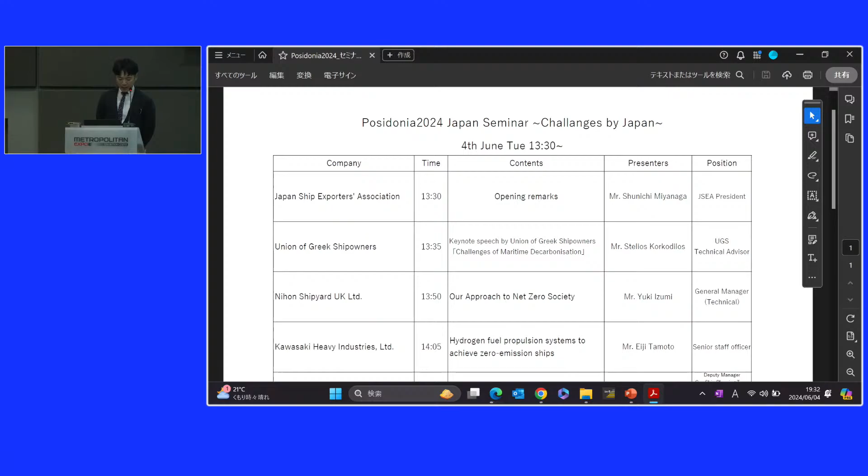I hope you are enjoying this wonderful maritime exhibition, Posidonia, in the brightest weather. Today we'd like to share the latest activity from Japanese maritime industry in this seminar. This seminar is organized by Japan Ship Exporters Association and sponsored by Nippon Foundation. We will cover the most interesting and challenging topic in the maritime industry, which is greenhouse gas emission reduction as well as energy efficiency. I believe all of you will find them interesting, and I'm sure you will be satisfied with our event. Therefore, I hope you can attend the whole of this seminar.

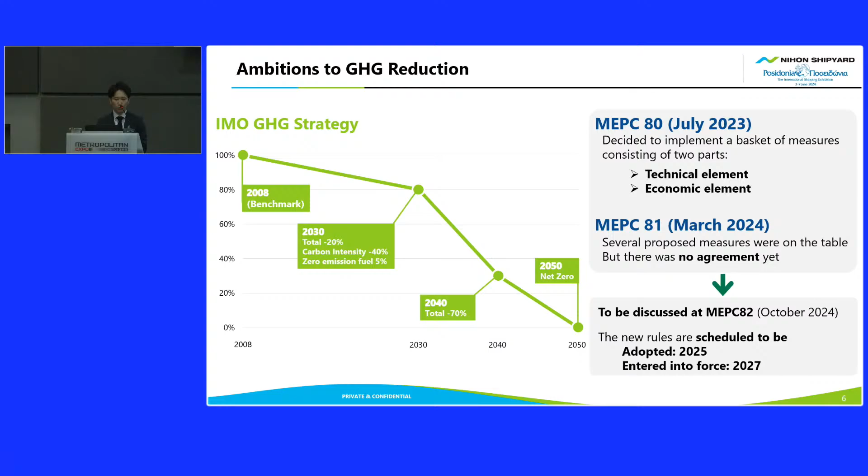Anyway, our final goal is to reach net zero emissions by 2050. So what can we do for GHG reduction? There are several approaches to GHG reduction.

First key is resistance reduction. We will continue improvement of hull forms and energy-saving devices because it's very important to improve the vessel's fundamental performance. Also, alternative fuels are an important approach. And we have other ways, such as renewable energy, operational solutions, and other technologies such as shaft generators and carbon capture systems. The key point is to combine these various technologies.

And from the next slide, I'd like to explain our approaches to GHG reduction. Oh, sorry. First one is hull form improvement and energy saving devices.

Our biggest sales point is that we have test tanks in our technical research centers, so we can develop high efficient, high performance hull forms and optimize our energy saving devices. Also, we think the vessel's performance under actual sea conditions is very important.

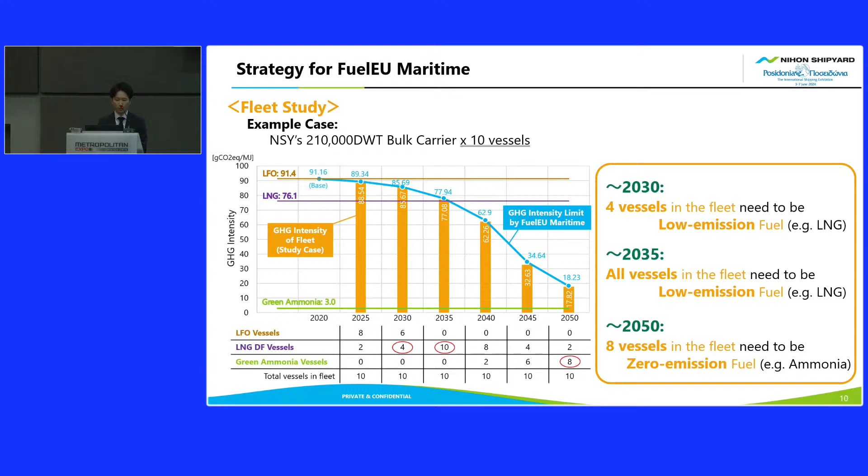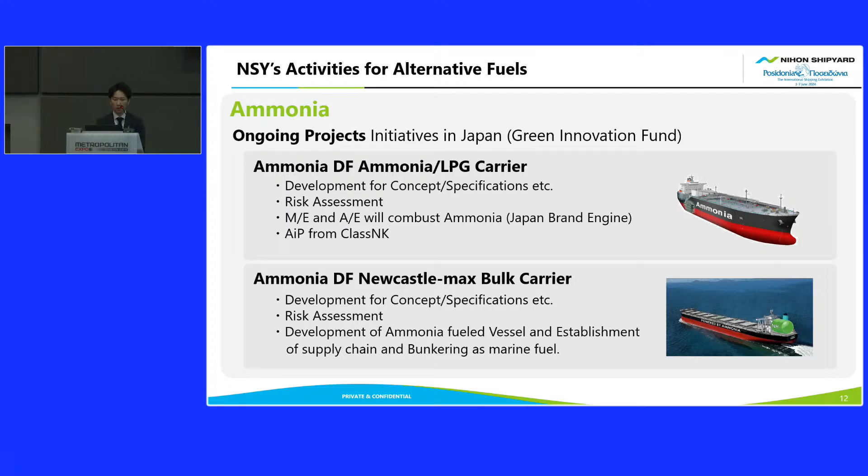For ammonia fueled vessels, we have 2 ongoing projects: one is an ammonia fueled ammonia LPG carrier, and the other is an ammonia fueled Newcastle Max bulk carrier. Through these projects, we will establish our technologies.

Renewable energy is also one of the solutions. We can conduct installation studies for a wind-assisted propulsion system called WAPS. Energy saving from WAPS does not depend on the fuel type. When WAPS is installed on an alternative fueled vessel, the payback period is shorter and benefits are greater compared to a conventional fueled vessel.

Regarding other technologies, carbon capture system, shaft generator, and air lubrication system are also major ones. We've carried out feasibility studies, and we can conduct installation studies for such technologies on our vessels.

In closing, this is today's summary. There are several approaches to GHG reduction, and resistance reduction is very important for fundamental vessel performance. Switching to alternative fuels is necessary for reducing GHG intensity, and it is possible to combine multiple technologies.

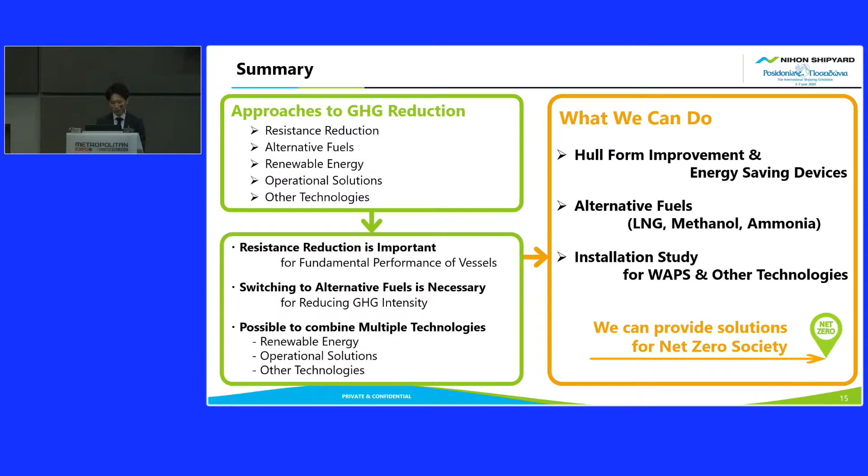Finally, let me close today's presentation with our company's motto: growing together with our customers through shipbuilding and offshore technologies. Thank you very much.

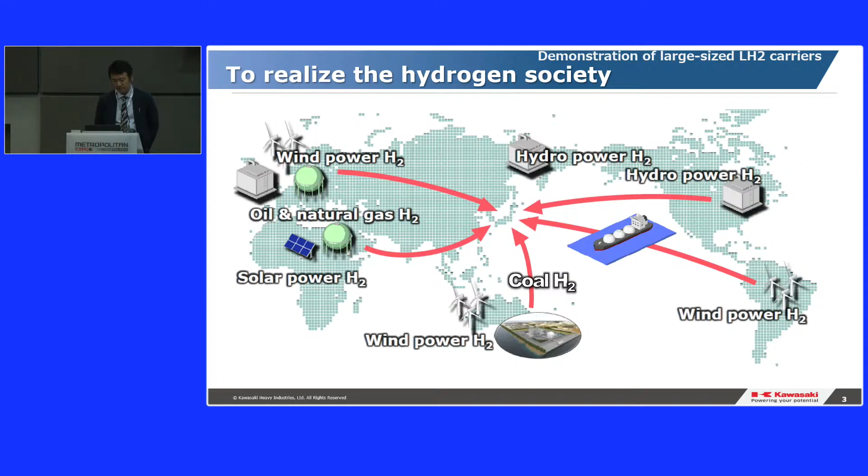This is the concept of a CO2-free hydrogen supply chain. The objective is to establish a stable supply of hydrogen while suppressing CO2 emissions. CO2-free hydrogen can be produced using renewable energy. It can also be produced from fossil fuel when combined with CO2 capture and storage systems. The produced hydrogen is liquefied and transported to Japan by liquefied hydrogen carriers. In Japan, the hydrogen is used for power plants and other consumers. For transportation over long distances, mass transportation of hydrogen is needed, and large-size LH2 carriers are also necessary.

Kawasaki has built more than 40 LNG carriers and more than 60 LPG carriers. Therefore, we have a lot of experience and technical knowledge about propulsion plants for liquefied gas carriers. In 2020, we built Suiso Frontier, the world's first LH2 carrier, which proved that it was possible to carry LH2 over a long distance. Now we are developing a large-sized LH2 carrier by using our experience with liquefied gas carriers.

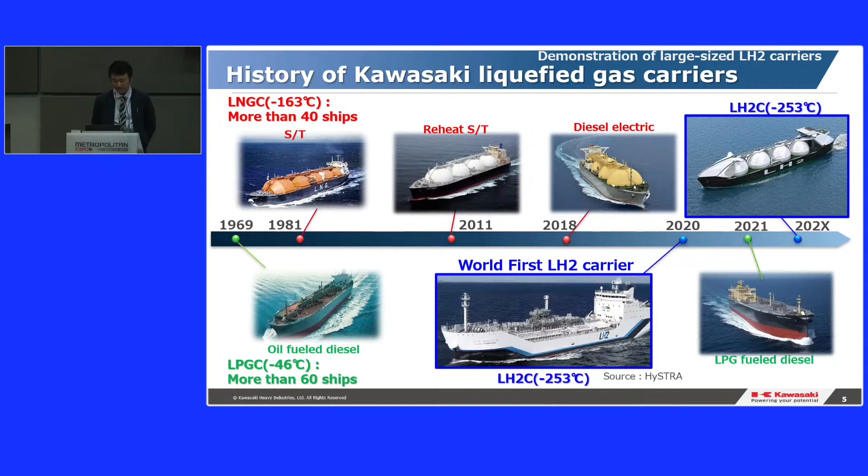This is the large-sized LH2 carrier that we are developing. The most important feature of this ship is that it can achieve zero emission by using hydrogen gas as fuel. So when we use hydrogen as fuel, we have to understand its characteristics.

There are mainly four important points to design the hydrogen propulsion plant. First, low gas density and diffusion. Hydrogen gas has a low gas density and its diffusion rate is fast, so it's important to be well ventilated in enclosed spaces and to purge the gas with inert gas.

Next, flammability. Hydrogen gas is easy to ignite and it catches fire even from static electricity, so it's necessary to have anti-static measures and to avoid flammable objects. Finally, embrittlement. Hydrogen gas makes metals brittle, so it's important to select suitable materials for it.

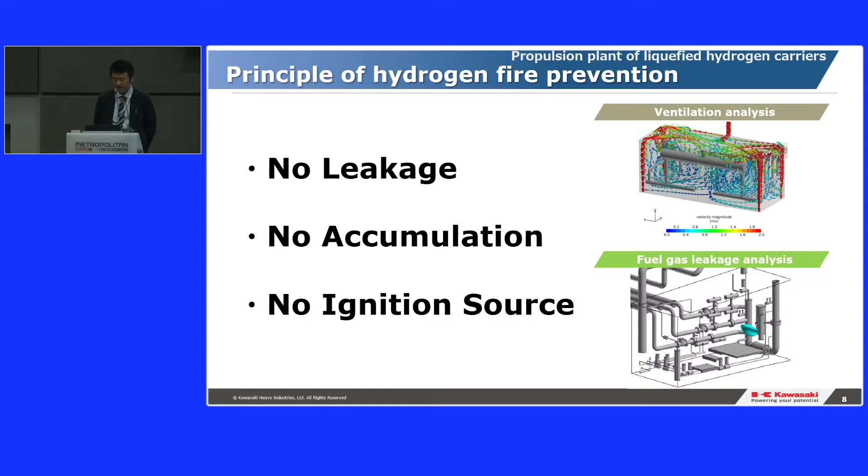Boil-off gas handling from cargo tanks is very important on an LH2 carrier. There are three requirements for its propulsion plant. First, the propulsion plant can use boil-off gas for propulsion. Second, it can control the pressure and temperature in the cargo tank. Third, it shall have high safety and reliability. To satisfy these requirements, we selected a steam turbine plant for the large-sized LH2 carrier.

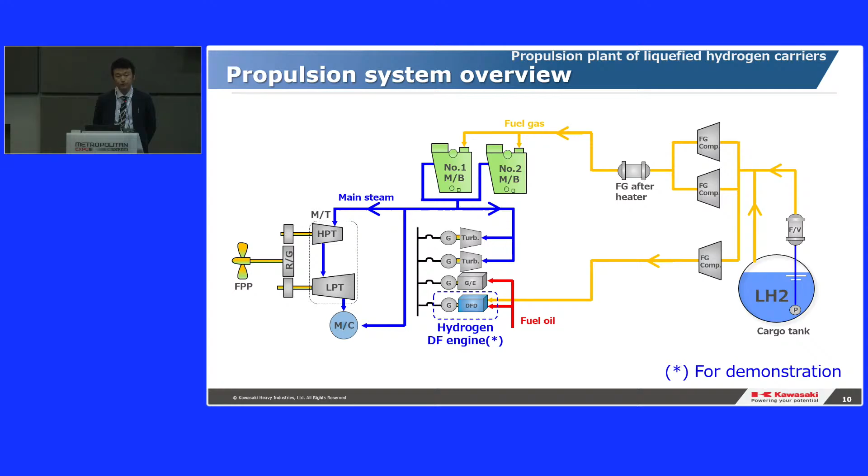The hydrogen dual fuel boiler has three fuel modes: fuel gas mode, fuel oil mode, and dual fuel mode. It can burn only hydrogen gas without fuel oil. The burner was developed based on an LNG fuel burner, and a prototype burner was tested in April 2021. We have obtained approval in principle from Class NK in 2022.

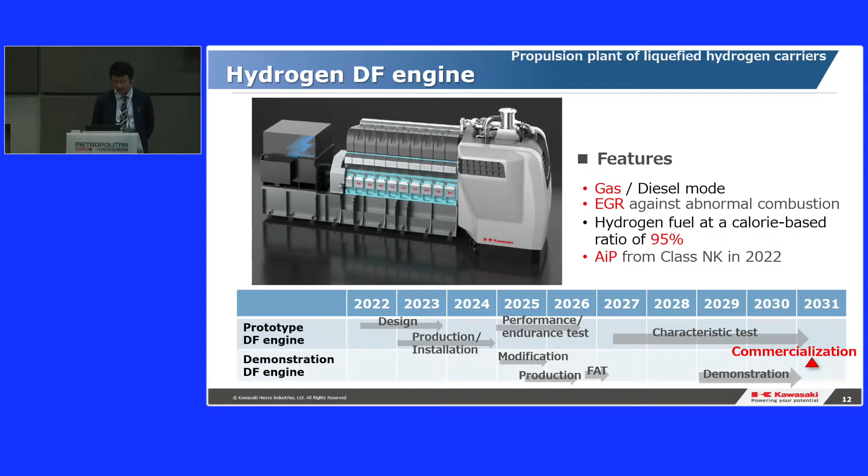The hydrogen dual fuel engine that Kawasaki is developing has a capacity of about 2.4 megawatts, and it has an exhaust gas recirculation system for gas mode operation. It can be operated with hydrogen fuel at a calorie-based ratio of 95%. Kawasaki has obtained approval in principle from Class NK. From this year, we will carry out combustion performance tests with a prototype engine. Commercialization of this engine is scheduled for around 2031.

There are mainly four types of hydrogen propulsion systems. First, steam turbine plant, which consists of a main boiler and main turbine. It's going to be used for the large-size LH2 carrier, which can achieve zero emission. Second, diesel electric plant, which consists of generator engines and propulsion motors. The generator engines can burn hydrogen gas.

Generally, the diesel electric plant is expected to have higher fuel efficiency than the steam turbine plant, but the dual fuel generator engines are still under development. Third, slow-speed diesel, which is directly coupled to the propeller. This is also expected to have higher fuel efficiency, but it is also under development.

Finally, electric propulsion plant using fuel cells and batteries. This can achieve zero emission. The power output of this system is smaller than others for now, so it's suitable for small-sized ships. We will need to monitor the trend of development of each propulsion system in the future.

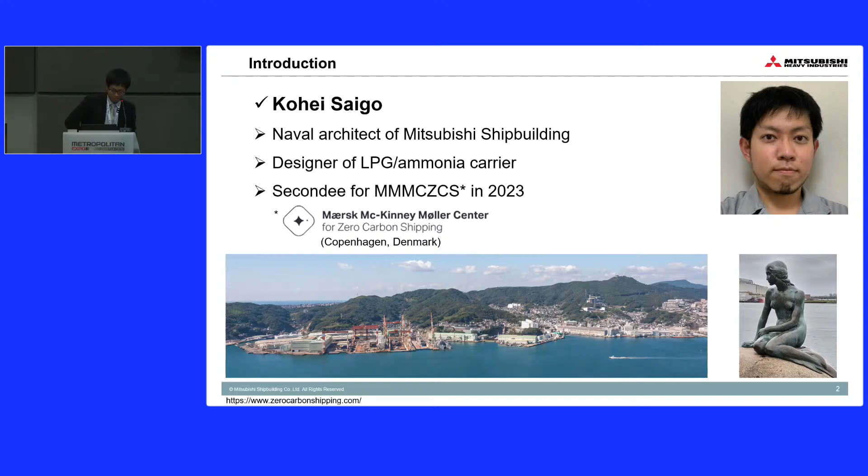Let me introduce Mitsubishi Shipbuilding. We were established in 1884, and now we are one of the group companies of Mitsubishi Heavy Industries. We are doing new building, repairing, and engineering of merchant vessels, and also supplying environmental technology such as SOx scrubbers, fuel gas supply systems of LNG and ammonia, and CO2 capture, and so on.

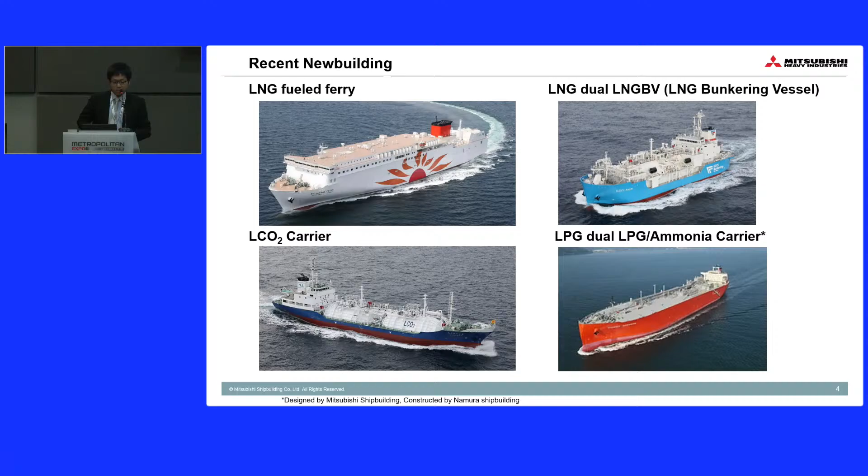I used one keyword in the previous slides, which is decarbonization. The maritime industry is faced with the goal of net zero by 2050, indicated by MEPC 80. And we have many options.

Is it okay? Okay, so we have many options starting from here. Okay, we are safe, don't worry.

We have many options for sophisticated design and energy-saving devices, starting from efficient hull form, propeller refinement, ESD, wind assistance, and air lubrication, and so on. We also have the option of carbon capture, onboard carbon capture. But I believe we cannot avoid using alternative fuel to achieve net zero by 2050.

So which alternative fuel should be used? We have many options as well: FO, methane, methanol, LPG, hydrogen, ammonia. But each fuel has its pros and cons.

Group 1 contains carbon and emits CO2 when burned, but it's relatively easy to handle compared to other fuels. The second one, hydrogen, emits no CO2 since it doesn't contain carbon, but we have to consider its extremely low temperature when storing it on board the vessel.

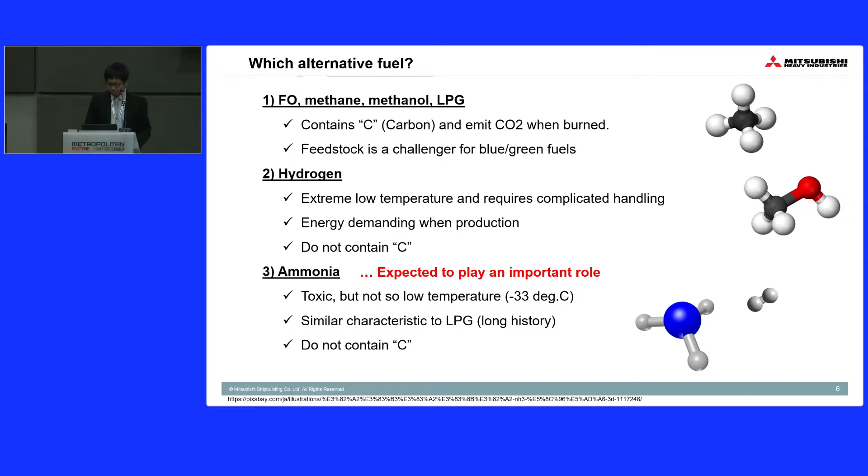Let me introduce ammonia from the basics, though you might already know. Ammonia has a relatively low energy density.

So it needs volume. And of course, ammonia is toxic, even at the ppm level, and it's also flame retardant, which can be a hurdle when developing engines. It's also corrosive to copper or other materials.

Considering these characteristics, we have to consider these items when applying ammonia fuel to vessels. First is efficient arrangement—different from onshore facilities, ships have very limited space, so we have to utilize this limited space as much as possible. Second, we need a robust system.

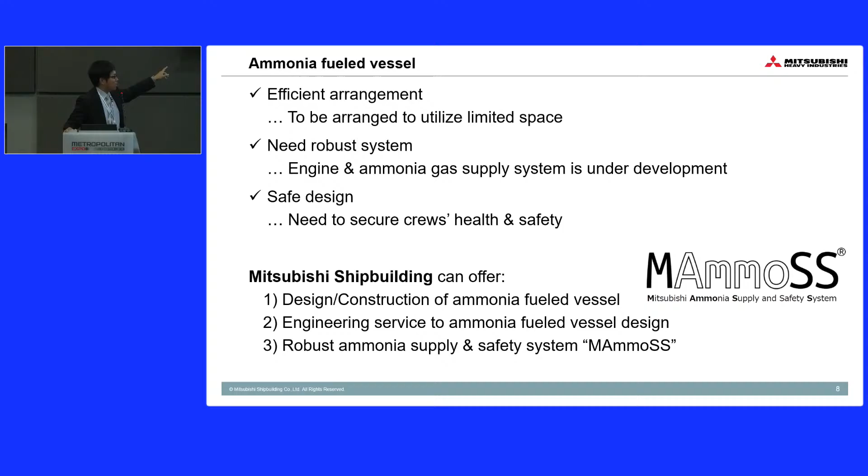As a sample of the first, second, and third items, at the last of my presentation let me introduce our activities. This is the latest project on ammonia carrying vessels. We have many experience of construction of LPG carriers, LNG carriers, and other gas carriers, so we began with gas carriers. Over a few years we designed VLGC, very large ammonia gas carriers, ammonia FSRU, ammonia bunkering vessels, CO2 carriers, and ammonia carriers and so on.

And now we are applying the knowledge and experience from this design stage to other non-gas carrier, ammonia-fueled vessels, including container vessels, PCTCs, tankers, bunkers, any type whatever.

Moreover, to expand the utilization of ammonia fuel further, we developed our own system, MAmmoSS, which stands for Mitsubishi Ammonia Supply and Safety System. This system is composed of a fuel supply system and an ammonia gas abatement system. The abatement system treats ammonia to the required level of concentration so the vessel can safely emit the remaining ammonia gas to the air.

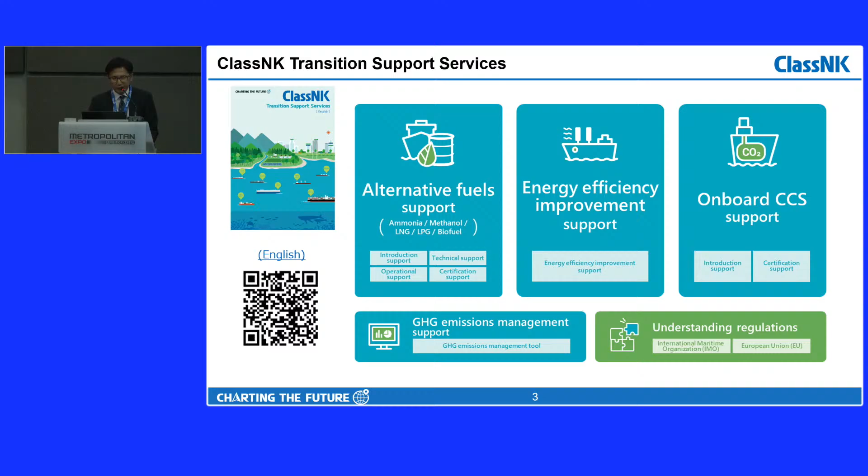Our support mainly focuses on these areas, covering from introduction to operation. Moreover, we provide tools to support GHG emissions management and the latest information on IMO and EU regulations as a white paper and FAQ, etc.

From this slide, I would like to introduce the overview of each support shortly. As for alternative fuels, in order to support the introduction, we published the Alternative Fuel Insight, which gives the trends of alternative fuel ships, alternative fuel supply forecasts, and cost simulation, etc. I will touch on this insight at a later stage.

In terms of safety aspects, ClassNK can support the introduction of all kinds of alternative fuel ships through providing guidelines for alternative fuel ships, which outlines the safety requirements for the design and construction of alternative fuel ships. In addition to these guidelines, NK can also offer technical support for the construction of new building ships, obtaining AIP, and retrofitting of existing ships utilizing our technical knowledge.

We also recognize the importance of establishing an operating procedure and seafarer training requirements for alternative fuel ships because they directly concern onboard safety management systems. To address these critical areas, we are actively preparing to issue guidelines detailing the operational procedure and seafarer training requirements on alternative fuel ships. We are also developing e-learning to support and enhance seafarer training.

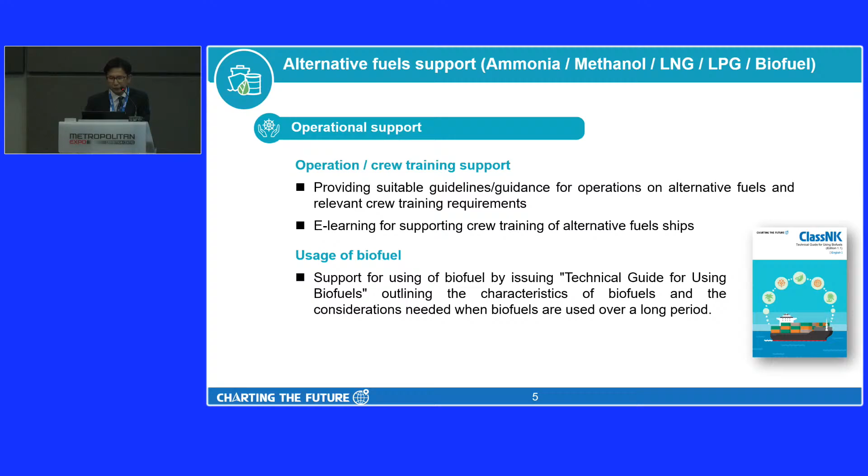Furthermore, with regard to the use of biofuels, since biofuels can be used without major modification of the existing engine itself, it is recognized that biofuels are one of the viable options in the transition period. So, in order to support the introduction and use of biofuels, we have issued a technical guide for using biofuels.

We also believe that the need for third-party certification will increase for ensuring reliability in decarbonization activities. For example, we can offer certification services to certify biofuel production methods and GHG reduction effects, etc. As certification is one of our strong areas, we will continuously develop the certification menu for GHG reductions in line with customer needs and the regulatory situation.

From here, let's move on to energy efficiency improvement support. Energy efficiency improvement technologies, such as wind assist propulsion systems, air lubricating systems, and energy saving devices, etc., have already been introduced on a lot of ships. On the other hand, the fuel efficiency of each energy saving technology is different, and the appropriate technology differs depending on hull form, ship type, and size, etc.

Therefore, it could be challenging to select the suitable technology for an individual ship from a wide range of options. In the decision-making process, we provide information on current trends, such as which technology has been adopted on individual ships, what is the expected effect, what is the actual effect, and so on, from our accumulated knowledge.

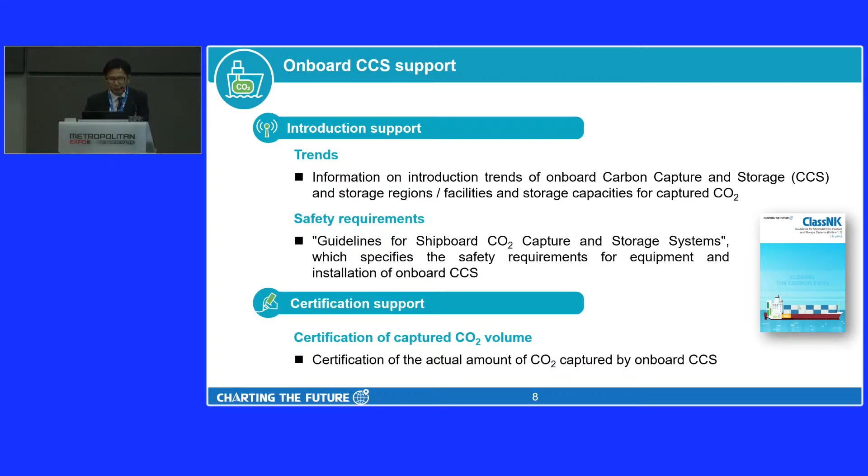We also provide technical support by issuing guidelines on the safety requirements for onboard CCS. In addition, it's expected that there will be growing demand for third-party certification of the actual amount of CO2 captured by onboard CCS to appeal to relevant stakeholders. We are now in the process of establishing the certification scheme for the amount of captured CO2. Eventually, we will be able to support the entire process from the introduction of onboard CCS to the storage of CO2.

So I have focused on the three main support in this presentation so far, but regardless of GHG emissions reduction measures, verification for GHG emissions from the ship is required, and management of GHG emissions from the ships is important for shipping business.

Through our Class NK MRV portal, we verify GHG emissions under IMO DCS and EU MRV. We also verify GHG emissions for specific periods or voyages and issue certificates to meet various verification needs.

In addition to Class NK MRV portal, you can use Class NK Zeta, a tool for visualizing GHG emissions. This tool will help you check GHG emissions and CII rating, and it enables you to simulate potential changes of GHG emissions and CII rating. It also includes an EU ETS feature, and we plan to add the function of Fuel EU Maritime in the near future.

We actively disseminate useful information on IMO and EU regulations. We published a white paper analyzing the IMO GHG reduction strategy adopted last year. We also summarize information on the EU ETS and Fuel EU Maritime in FAQ format to assist in preparing for regulations.

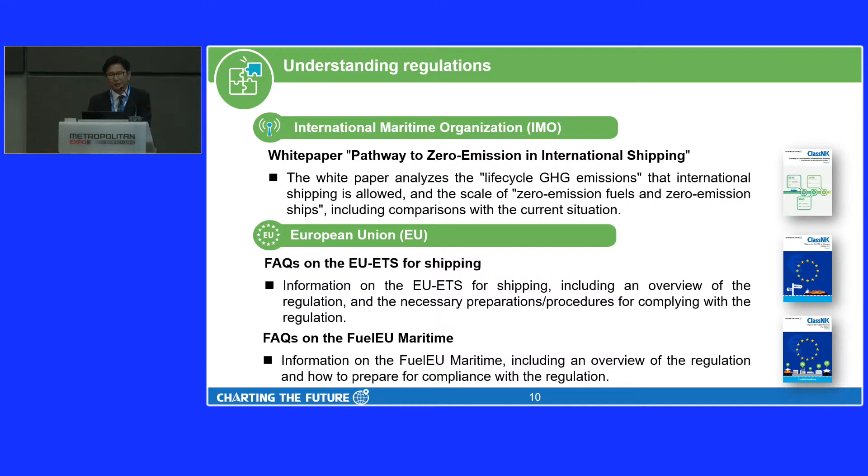Finally, I would like to introduce Alternative Fuel Insight, one of our support services, as an example. This insight was published last month, and our Alternative Fuel Insight consists of mainly 4 topics.

First topic is understanding regulations. Second topic is understanding trend. Third topic is understanding alternative fuels. Fourth topic is understanding cost.

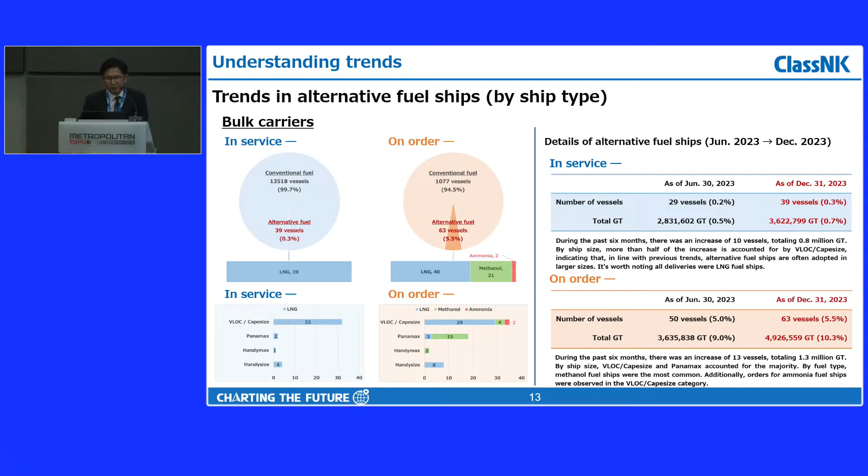As for other ship types, please check out the full version of our insight.

Please also check other simulation results and the simulation conditions in the full version of our insight, or come to the NK booth to ask and discuss the insight and our support services. We are waiting for you at booth number 10544.

In order to be a reliable classification society for our customers, we will continue to work actively. That's all. Thank you very much for your attention.

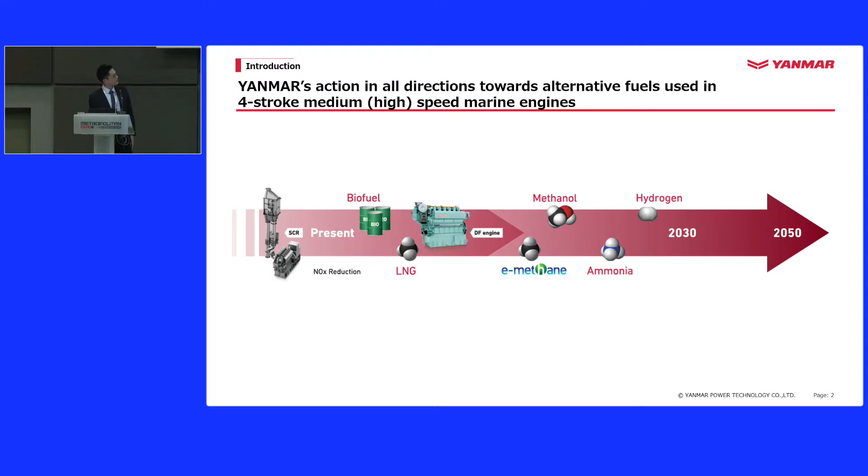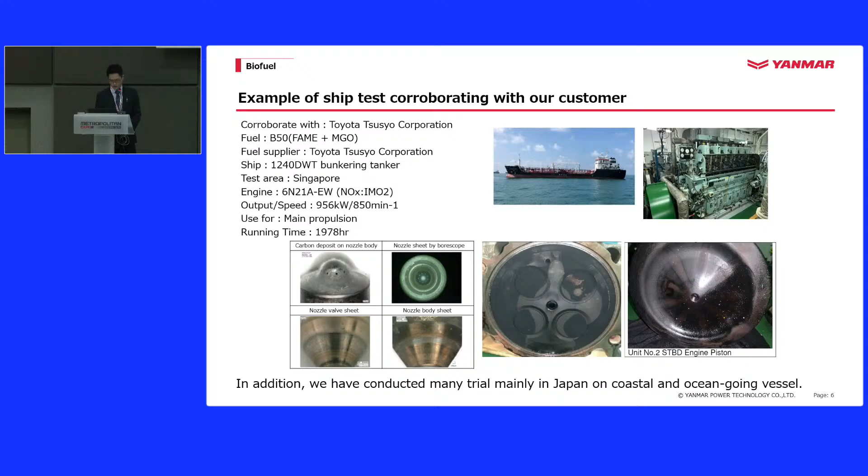The customer name is Toyota Tsusyo Corporation. The fuel is B50. Running time is around 2,000 hours. Carbon deposit on the nozzle seat and nozzle body showed no problem. If you use biofuels, please refer to Yanmar's service news, and please come to our booth.

Next, overview of methanol fuels. We think there are two combustion methods for methanol. First is low pressure port fuel injection, LPPFI. In this combustion process, methanol is injected into the intake port, where it evaporates and forms an air-fuel mixture, ignited by pilot diesel.

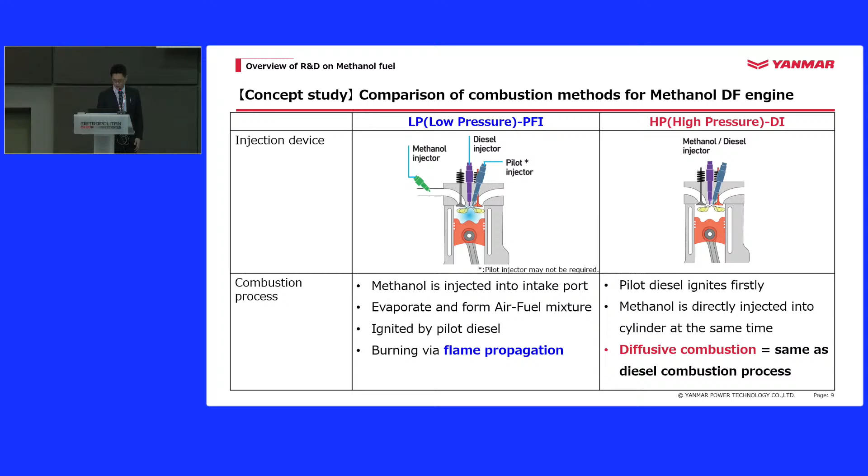The other method is high pressure direct injection, which is like diesel ignition—methanol and diesel are directly injected into the cylinder at the same time. The advantage of LPPFI is that it's a relatively simple system with possibility of retrofit, and shorter development periods. On the other hand, HPDI allows a high methanol ratio.

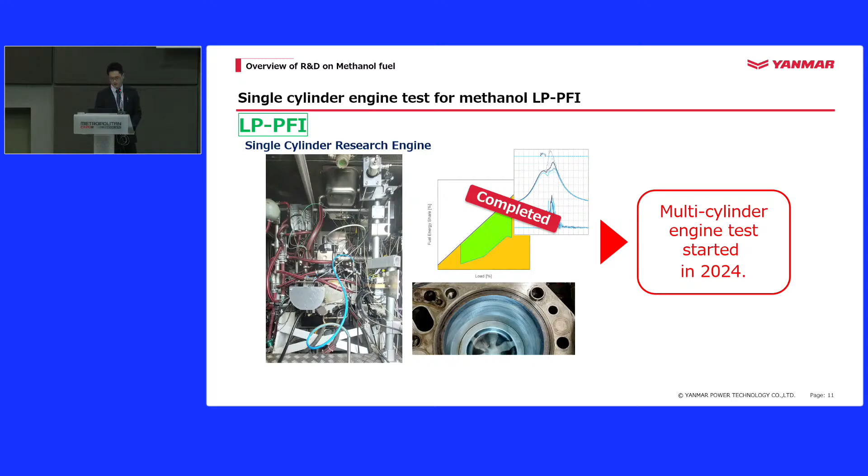This is a single-cylinder engine test for LPPFI. The single-cylinder research engine test is completed, so multi-cylinder engine testing started this year. The high pressure direct injection engine is now a research engine; we will establish the technology for HPDI combustion for methanol.

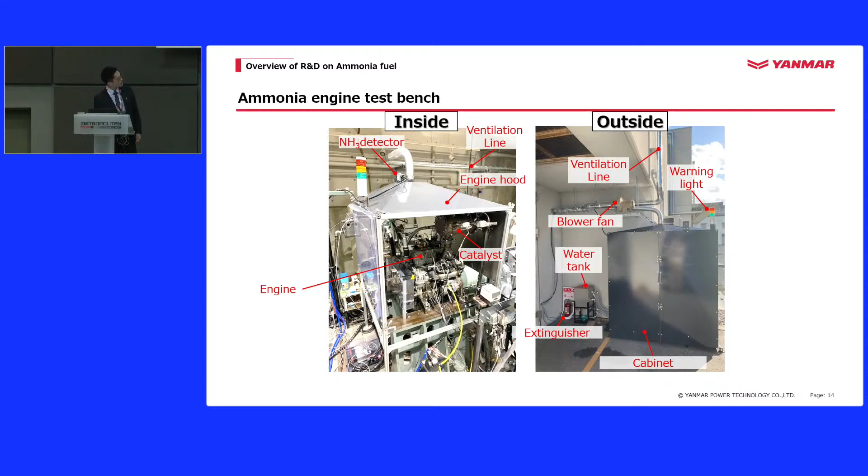Next, ammonia fuel. This is also being tested with a single-cylinder engine. On the right side is the tank, left side is the single-cylinder engine. Since ammonia is harmful to people, an NH3 detector is installed like this.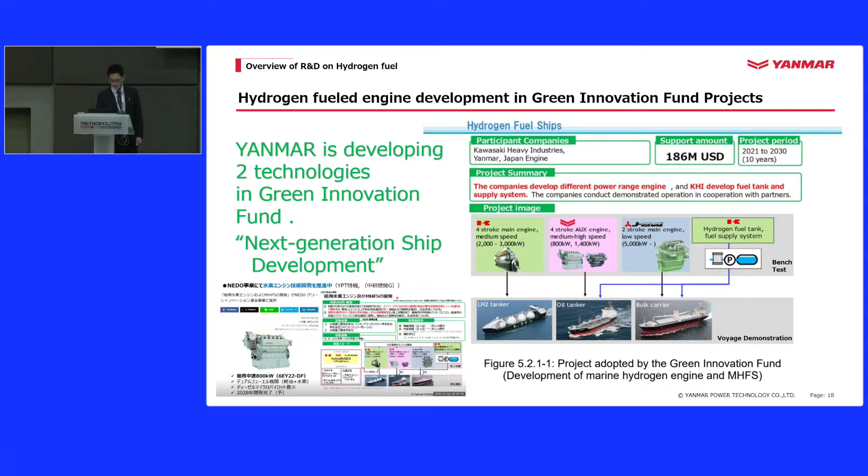Finally, hydrogen fuel. We will develop a hydrogen engine sponsored by the Green Innovation Fund. This engine is developed with 3 companies. Now the single-cylinder engine test is completed. The multi-cylinder engine test will be completed in 2026, and the high-speed spark ignition engine will be completed in 2028.

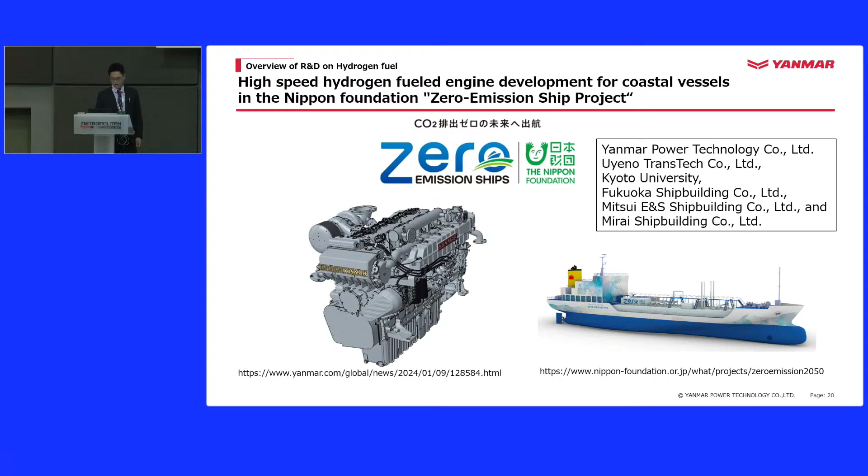Next, sponsored engine. This is a high-speed hydrogen engine. The bore size is 155 millimeters. This is sponsored by the Nippon Foundation. We will call it the Zero Emission Ship Project.

This is a test, an outdoor test and an incline test. Consider all piping and cable connection ports are on a single side. In the incline test, there is no problem with condensed water in the cathode side at inclination.

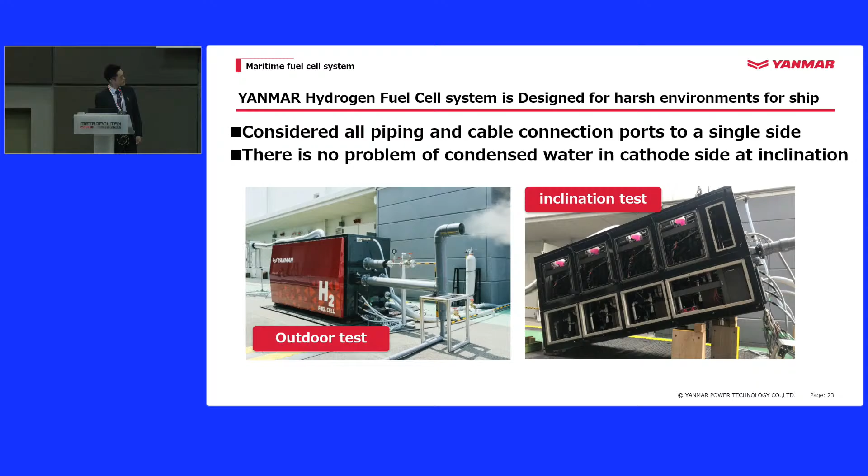In summary, Yanmar is taking action in all directions towards alternative fuels in 4-stroke, medium and high-speed maritime engines. Yanmar Power Technologies is developing in all directions to develop alternative fuels in all directions. Thank you for listening.

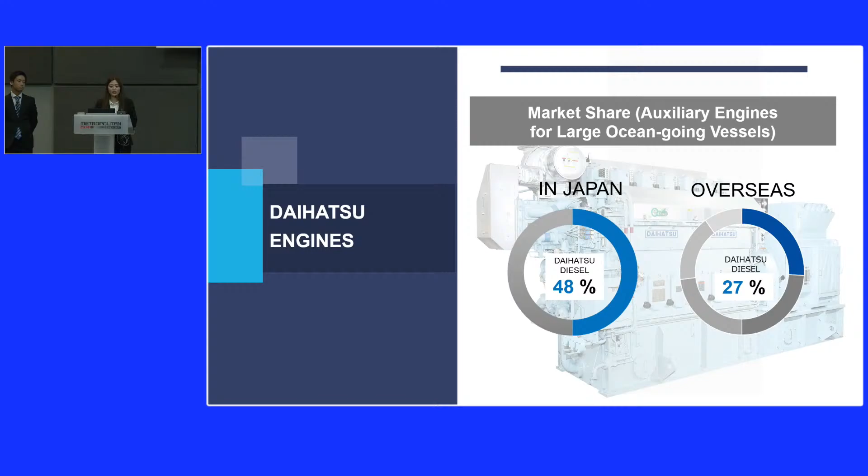Next, we will introduce our major products, auxiliary engines. About Daihatsu diesel generating engines for large ocean-going vessels, we have about a 50% share for Japanese shipyards, and it has a market share of about 25% for shipyards all over the world. Daihatsu diesel generator engines are operating all over the world.

And we also sell SCRs along with engines. In order to meet NOx regulations, we inject urea water to remove NOx from exhaust gas. The bypass performs the switching operations automatically according to the operating condition of the SCR system. No need for urea water in Tier 2 areas. Of course, we have a lineup that can accommodate all output ranges of our engines.

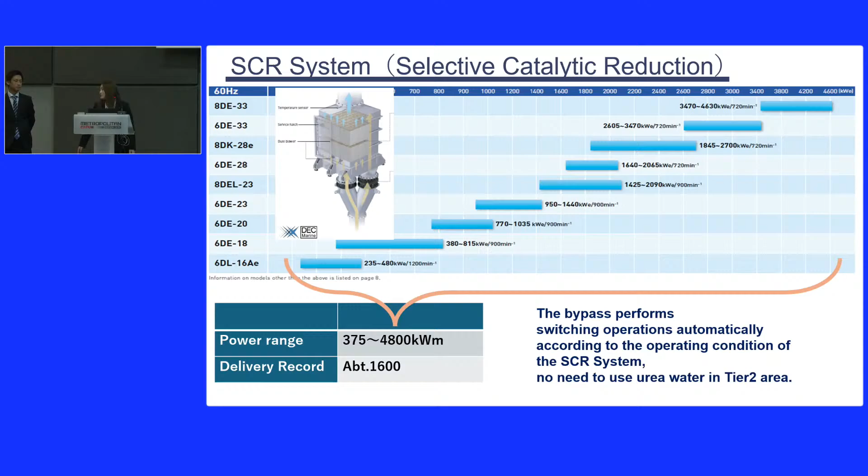Hello, my name is Keitaro Nishiyama from the Technical Management Division. I'm in charge of LNG-DF and will be involved in the development of methanol engines from this year. Daihatsu Diesel has manufactured numerous engines of various outputs, which have been chosen and operated by our loyal customers.

Based on our reliable and high-performance diesel engines, we have developed natural gas-powered engines. We have completed shipping of 5 models.

The LNG DF engine can reduce carbon dioxide by approximately 25% by using LNG fuel, but the GHG reduction effect is weakened by the occurrence of methane slip. We have worked to reduce methane slip and have reduced the methane slip of the engine alone by more than 40% compared to conventional engines at 50% engine load.

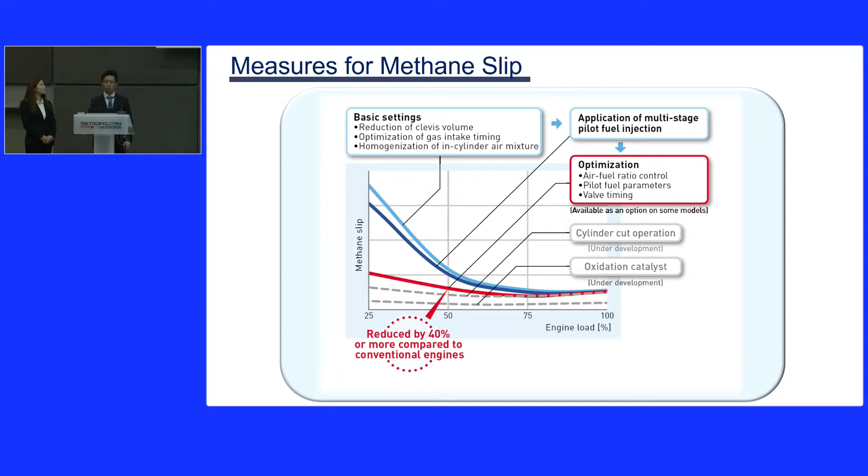Furthermore, with the aim of further reducing emissions, we are proceeding with the development of cylinder cut operation and oxidation catalysts. As the next stage of developing LNG-powered engines, we are making efforts to achieve zero carbon dioxide emissions from our engines. I would like to now introduce the current status of development of new generation fuel engines.

Regarding hydrogen, we have been conducting basic research with subsidies from the Ministry of Transport from 2021 to the end of last year. We have focused on basic research in collaboration with universities, and last year we conducted more detailed hydrogen combustion tests using our single-cylinder test engine.

Single-cylinder tests have already been conducted using methanol, ammonia, and hydrogen fuel, and the engine performance and GHG reduction effect of each fuel characteristic have been confirmed. Although this is still at the basic testing stage, we have confirmed that the GHG reduction effect is 12% for methanol, 82% for ammonia, and 96% for hydrogen compared to conventional fuels.

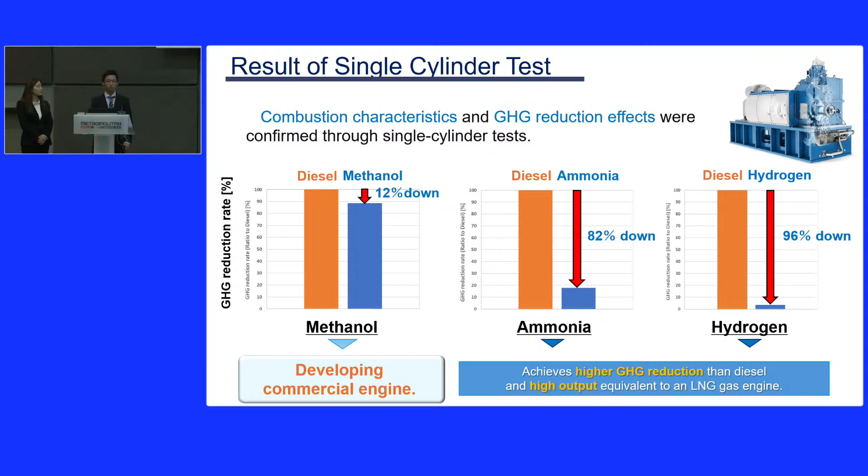First, I will describe the development of methanol engines. Single-cylinder engine testing has already finished, and recently demand for auxiliary engines for large container ships is increasing. So we are developing a methanol dual fuel engine based on our DE-33 type at first. After development of DE-33, we will expand to a smaller engine based on DE-23.

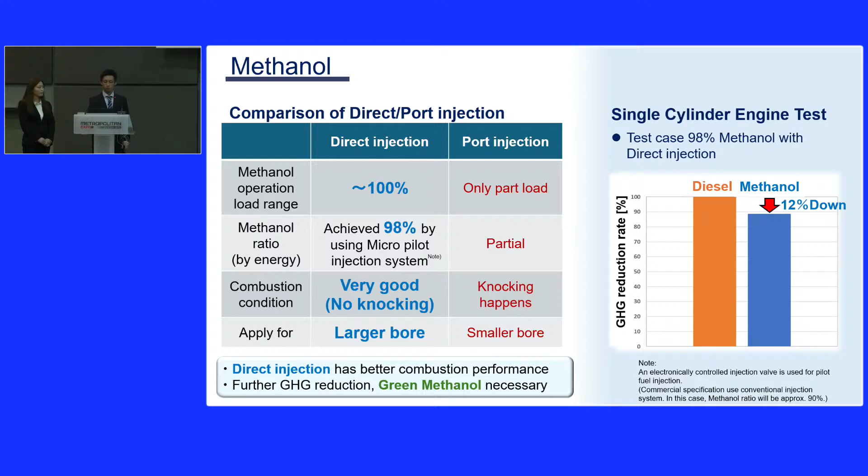requires green methanol. Next is ammonia. We have already completed single cylinder testing last year. The bore size is 285 mm. The highest ammonia ratio was 95% with 5% pilot diesel. In this case, GHG reduction was 82%.

However, we found very high ammonia slip and nitrous oxide. I think ammonia 80% with 20% pilot is a good balance from the viewpoint of exhaust emissions, but of course GHG will increase due to the increase in pilot fuel. Anyway, we need more engine testing and after-treatment testing.

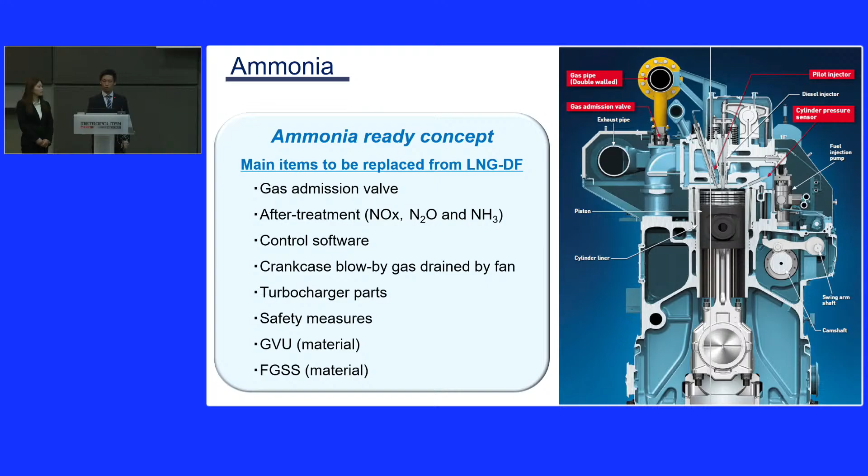As I mentioned, the first ammonia commercial engine delivery will be in 2028. This is too late for customers, so we will apply the ammonia-ready concept. We deliver the existing LNGDF engine as it is, then replace certain parts on board later.

Next is biofuel. Existing Daihatsu engines can use biofuel without any engine modification. FAME and HVO can be used in compliance with our guidelines.

Recently, shipping companies are using biofuels as onboard trials with Daihatsu engines. Most of them are B20 or B30, and maximum B100. Daihatsu asks customers to provide us a fuel analysis report. Then we will respond with some advice, and also issue a no objection letter as needed.

In addition, I would like to introduce fuel cells. Toyota has introduced Mirai, a vehicle equipped with hydrogen fuel cell technology, into the market. We, Daihatsu, as a member of the Toyota Group, are also conducting research and development of fuel cell technology for maritime use. Mirai means future in Japanese, and together with Mirai, we aim to create a future.

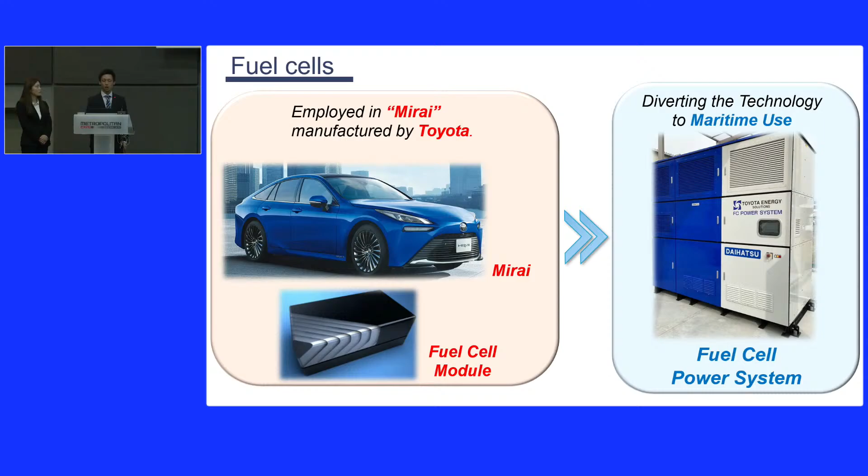In order to accelerate the development of new engines, we are planning additional investment in our Himeji factory to expand production capacity and also build a new facility for future fuel engine manufacturing. The investment amount is expected to be approximately 60 million euros.

Lastly, we are planning to change our company name next year. It will be Daihatsu Infinearth. Infinearth is a coined word of infinity and earth. Our group's corporate statement is technology for the earth. Through technology, we strive for harmony with the global environment and contribute to the realization of a sustainable society. Our new company name embodies our strong determination to provide infinite value to the global environment.

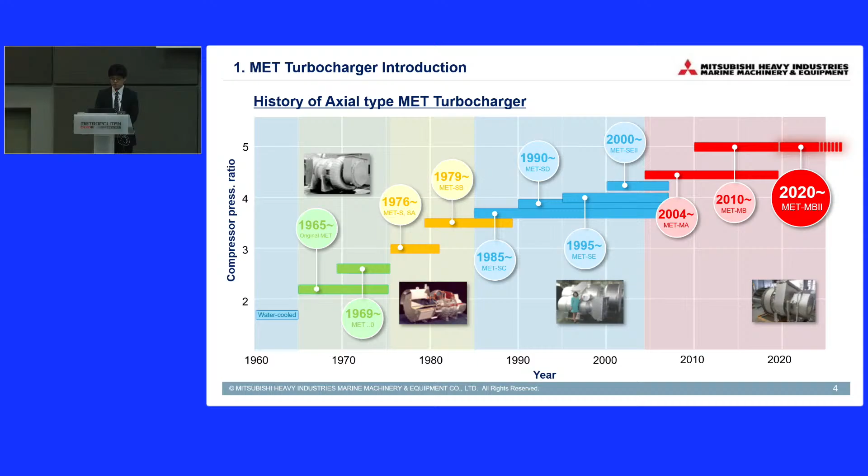In 2004, MET-MA was released to realize higher efficiency and larger capacity. In addition, the MET-MB, a high-pressure ratio turbocharger, was released to meet the demand for high scavenging pressure from the market due to Tier 2 regulations. In 2020, we released the MET-MB2 turbocharger, an improved version of the MET-MB. The MET-MB2 is the latest type of axial turbocharger, and I will explain it in the next slide.

Downsizing provides weight reduction and space saving. On the other hand, the basic structure is the same as MET-MB, so the MET-MB2 overhaul procedure is the same as MET-MB.

Next, let me explain about the application for DF engine.

This table shows delivery records of MET turbocharger to WinGD XDF engine. We have delivered 226 turbochargers to these engines. MET was applied to the world's largest Otto cycle engine, as shown in this article.

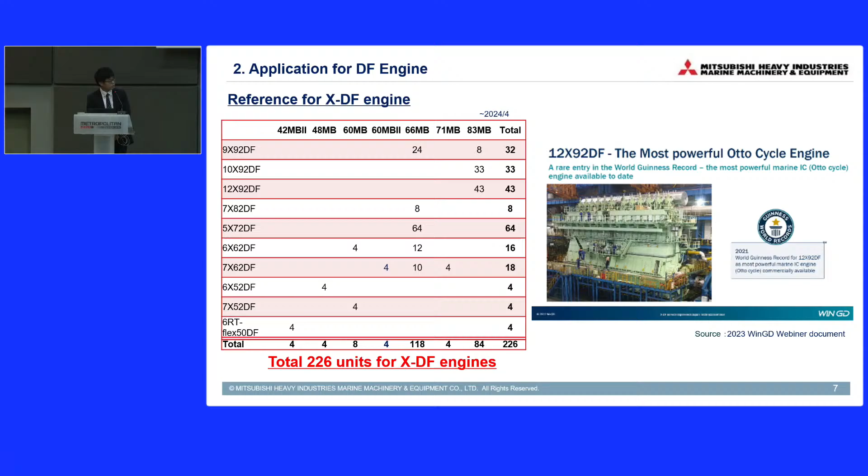As you can see, MET has been applied to many engines using the latest fuels. This picture shows the first ME-LGIM methanol engine with MET turbocharger. As shown in picture, MET-90MB, the world's largest turbocharger, and MET-60MB2 are installed.

Several modes of tests were carried out at the shop test, and it was confirmed that the required performance was satisfied in all cases. Orders for turbocharger for methanol engine is steadily increasing.

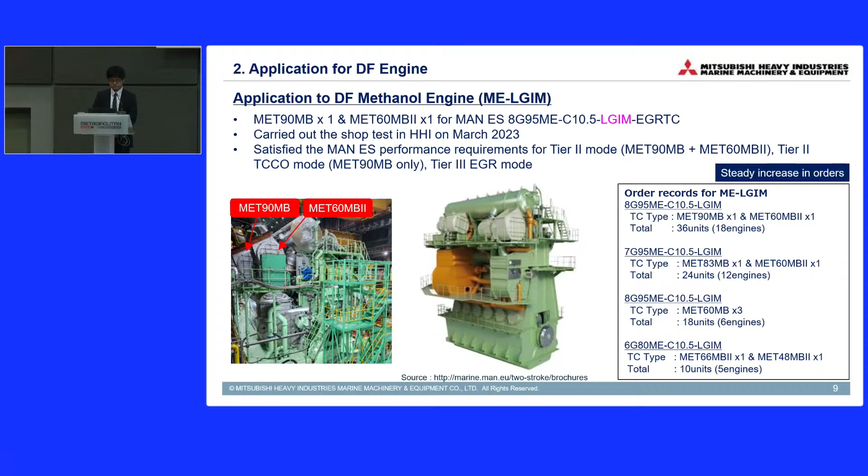We also recently received an order for a turbocharger for a green methanol DF test engine. We have delivered MET-83MB for this test engine. Several tests are scheduled in 2024, and we will cooperate with MAN ES and Hitachi Zosen for these tests.

The MET turbocharger will also be installed in the ME-LGIA engine, which uses ammonia as its main fuel. This project is for Mitsui E&S, a Japan engine builder.

The development schedule is as shown in the table. We have already delivered MET66MB2 for the test engine last year. This picture shows a turbocharger with the test ammonia engine. In cooperation with Mitsui E&S, we plan to conduct a full-scale test for about 1 year.

Also, we guess that slipping ammonia flows into the turbine side. Due to this, it has a potential corrosion risk, so we plan to change some components. Specifically, the material of O-rings using rubber and labyrinths using copper are going to be changed, as shown in this figure.

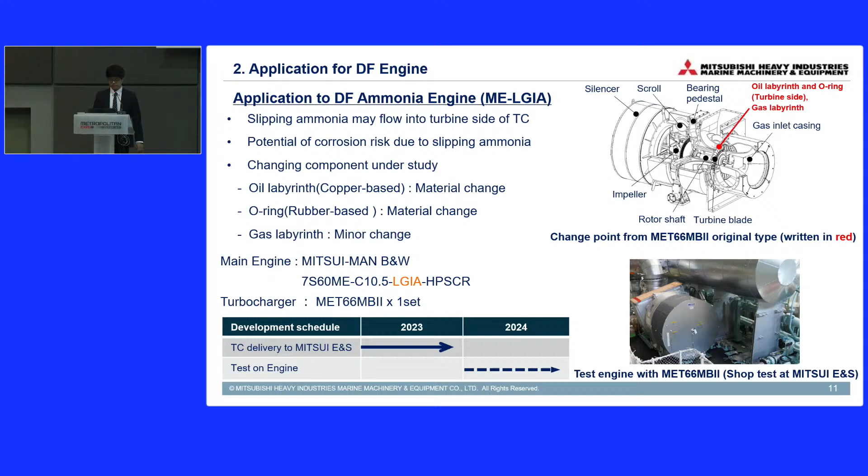We will also deliver the MET turbocharger to UEC LSJA engine, which is an ammonia-fueled engine of Japan Engine Corporation. We will deliver MET53MB2 this year, which has similar component parts delivered to Mitsui E&S.

For hydrogen-fueled engine, we are discussing turbocharger specifications with Japan Engine Corporation for UEC LSGH engine. We will deliver MET33MB2 in 2025. We are studying turbochargers in relation to the usage of hydrogen fuel.

Next, let me explain the energy-saving technology of turbocharger. From now, let me touch on the 3 solutions to improve fuel oil consumption. All of them can be done by retrofit work.

The first solution is turbocharger cutout. This is an engine with multiple turbochargers, one of which is cut out. By using this solution, exhaust gas flown into the operating turbocharger will increase. Thus, turbocharger during low load operation can be operated under the high efficiency region of it. Fuel oil consumption is expected to improve by approximately 2.5%.

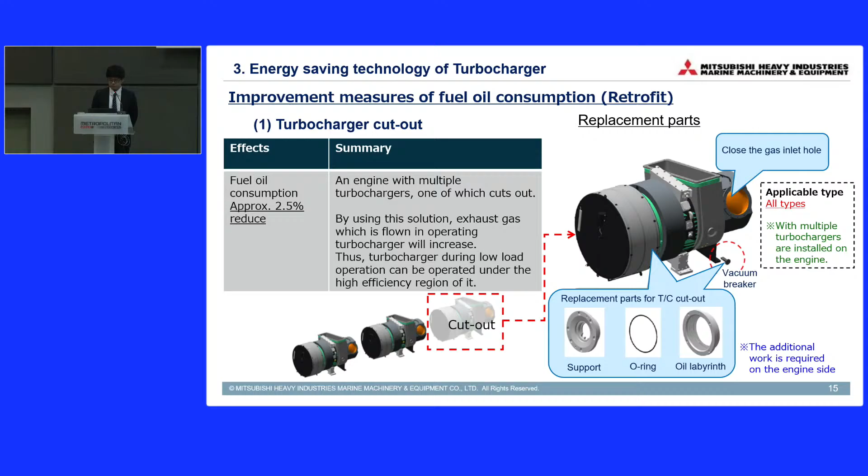Some parts need to be replaced when turbo cutout is applied. In addition to this, additional work is required on the engine side. This solution is applicable to all engines with multiple turbochargers.

The second solution is variable turbine inlet system, called VTI. This system can change the nozzle throat area in 2 steps by using a special nozzle and casing and butterfly valve. When the valve is open, the exhaust gas flows over the entire area of the nozzle, as shown in blue in the right side figure.

On the other hand, when the valve is closed, the exhaust gas flows only to a part of the nozzle, as shown in red. According to this function, the turbine capacity suitable for low load can be selected. These gas side parts need to be replaced when the VTI system is applied. Fuel oil consumption is expected to improve by approximately 3.3%.

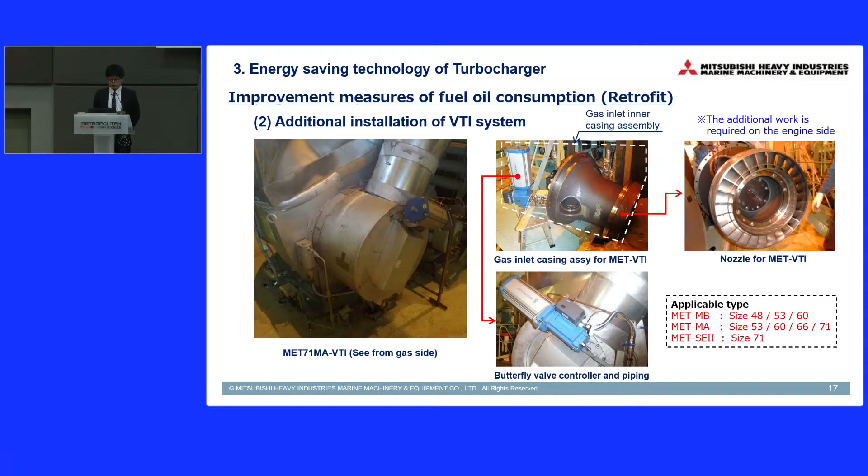This picture shows the exterior photo of MET VTI. VTI is applicable to this right side written MET turbocharger. Retrofit work can be basically completed by replacing gas inlet inner casing assemblies, as shown in these pictures. In addition to this, additional work is required on the engine side also. This butterfly valve is operated by air, so air piping connection work and cable wiring work shall be needed.

This EGB system needs some additional work on the engine side, same as the VTI system. Fuel oil consumption is expected to improve by approximately 2.5%.

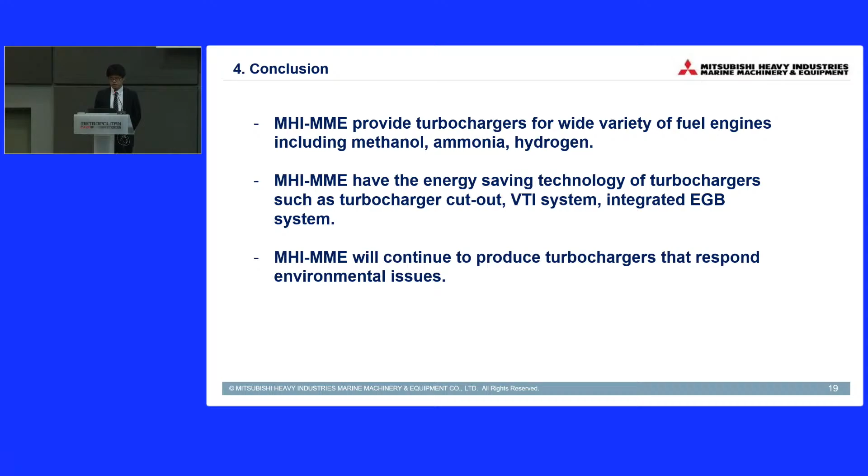Finally, here is the conclusion of our presentation. Our company, MHI MME, will continue to produce turbochargers that respond to environmental issues.

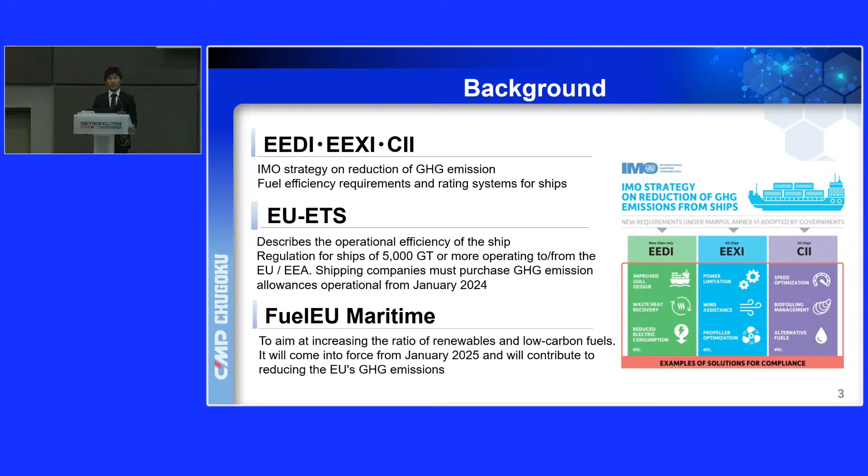So what is the best solution for new rules? With Chugoku's high-performance anti-fouling technology, it contributes to your lasting business.

First of all, let me introduce our silicone technology. We have been developing silicone coating for more than 40 years. For example, on the left side, BioClean Eco. BioClean Eco has been applied to offshore facilities and intake channels of power plants since 1984. At the bottom left, the yellow gate is the MOSE project. This is also one of our major achievements.

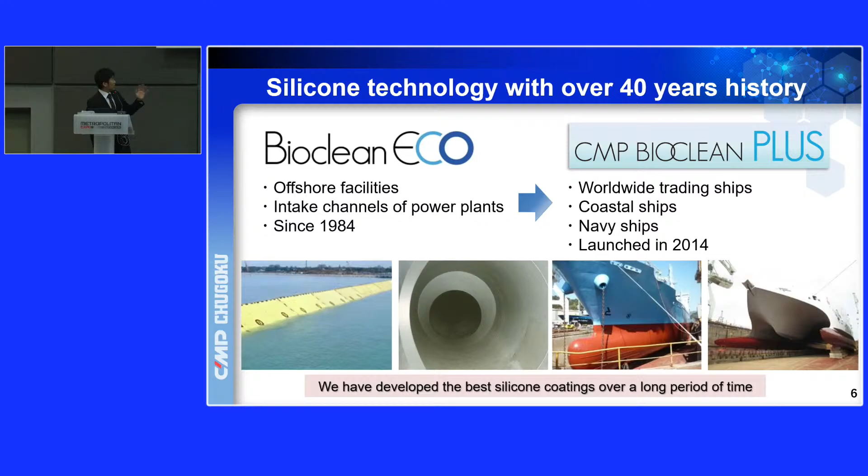Based on this technology, we have been developing new anti-fouling solutions for the shipping industry. This is CMP Bioclean Plus. It has been applied to worldwide trading ships, coastal ships, and navy ships. It launched in 2014. As you can see in this slide, we have developed the best silicone coating over a long period of time.

Next, I'd like to talk about CMP Bioclean Plus key technology. CMP Bioclean Plus has 3 key technologies. One key technology is stable silicone polymer.

This provides smoothness, low surface energy and elasticity, so it easily releases marine organisms.

The third key technology is small amount of biocide, only 5%. That means it's very significantly decreased compared to self-polishing anti-fouling.

So from now, let's check Bioclean Plus's actual performance.

First visible result is reefer ships after 27 months. Average speed, temperature, and activity are like this. Normally, ocean-going vessel activity is more than 60%. However, this vessel's activity is only 33%, almost half. So it's a very severe condition for anti-fouling.

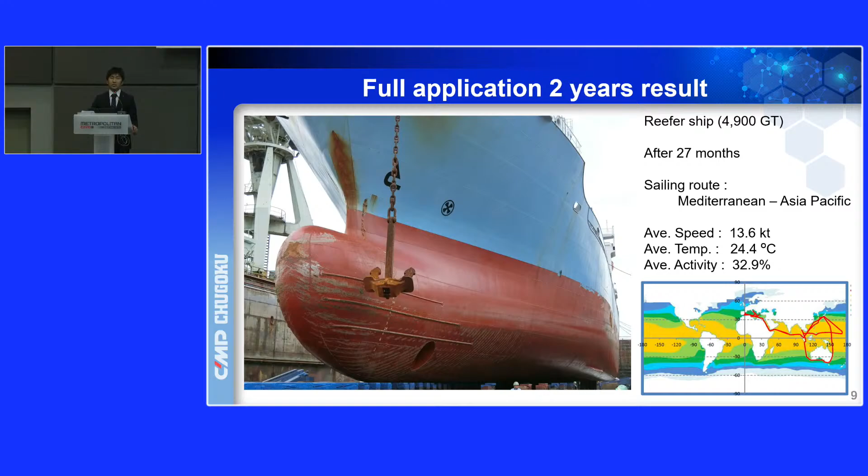However, please look at this picture. This is before washing. As you can see, CMP Bioclean Plus shows excellent anti-fouling performance - no barnacle, no slime like this.

Next vessel result, Ro-Ro passenger ships after 60 months. Average speed, temperature, and activities are like this. Sailing route is Indonesia coastal. As you know very well, Indonesia is a very high barnacle fouling area because sea temperature is very high - a barnacle paradise. That means a very severe condition for anti-fouling.

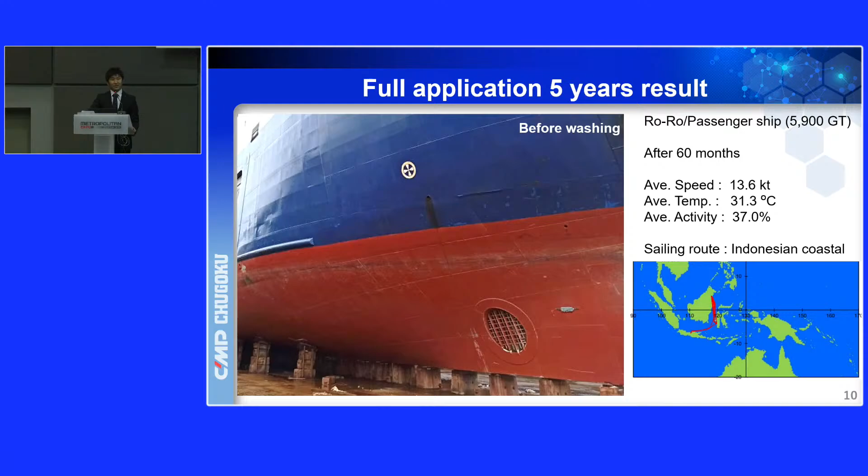However, please look at this picture - no barnacle. So CMP Bioclean Plus has excellent anti-fouling performance, a very interesting result.

Final vessel result is container ships after 59 months. Trading route is worldwide. Average speed, temperature, and activities are like this.

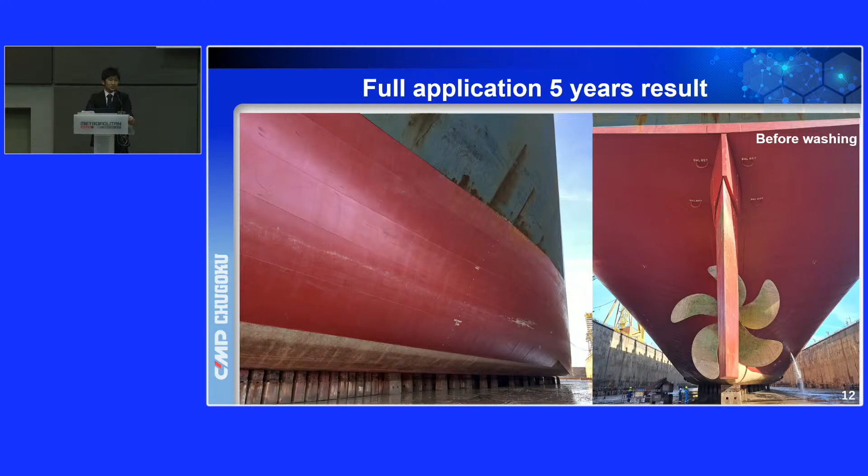The vertical area has CMP Bioclean Plus applied. As you can see, CMP Bioclean Plus is free from fouling. A very interesting result and good achievement.

Next, I'd like to talk about simulation of fuel saving performance. This simulation is for container ships. If we estimate this condition - activity is 60%, speed is 15 knots, in-service period 60 months, navigation distance per year 50,000, fuel consumption 19 tons per day, hull area like this, surface preparation is full blasting.

One case is market average anti-fouling, another case is CMP Bioclean Plus. This is fuel consumption, this is time. As you can see in this graph, market average anti-fouling fuel consumption is increasing year by year. On the other hand, CMP Bioclean Plus is almost stable. That means CMP Bioclean Plus fuel consumption is less than market average anti-fouling at all times.

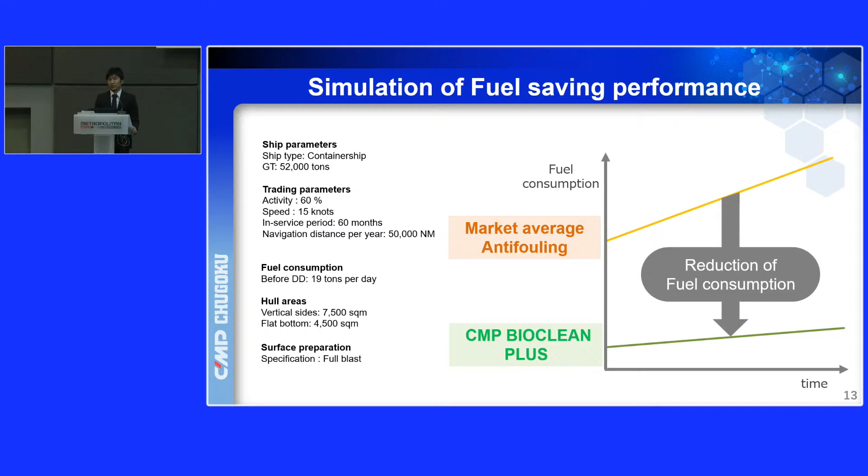Next, we'd like to talk about more detailed simulation using our simulator. This is our simulator result. This table shows fuel consumption, CO2 emission, and related cost over 60 months.

On the right side, visible is fuel consumption, fuel cost, and CO2 reduction. As you can see in this table, CMP Bioclean Plus fuel consumption is less than market average anti-fouling. Expected benefit would be 15%, meaning fuel cost savings of $3.9 million - a big save. In addition, CO2 reduction for CMP Bioclean Plus is also less than market average anti-fouling.

Expected benefit is 17,404 tons, which is effective for EU ETS cost. What's more, our simulator can predict CII rating. For example, left side shows anti-fouling, right side shows CII rating for 5 years. As you can see in this table, CMP Bioclean Plus is a good solution for CII rating.

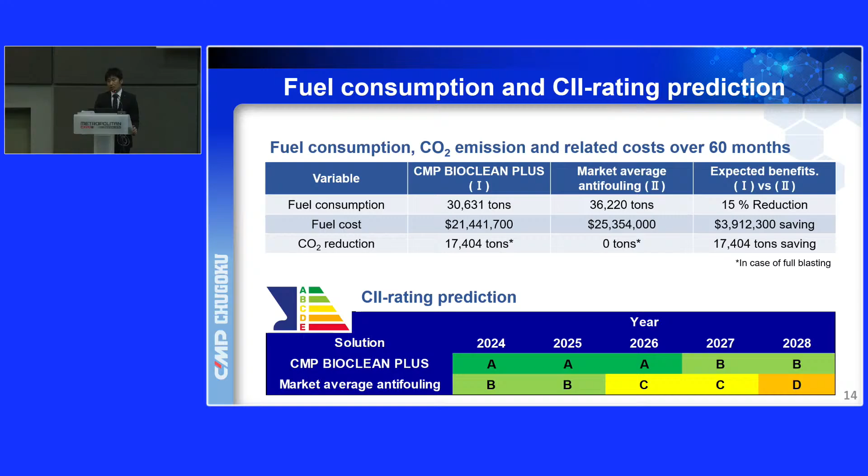There's one thing I'd like to share with you. Chugoku's simulator is an original system certified by ClassNK. The left side, our simulator, has received certification - ClassNK Innovation Endorsement. Also, the right side performance analysis has the same certification. We believe our certified system could support you in growing your business.

Now before I finish, let me summarize the benefits of CMP Bioclean Plus. First point is patented hydrophilic polymer and small amount of biocide, which provides freedom from fouling for the long term and excellent static performance.

Second point is ultra-low friction and excellent anti-fouling performance - you can achieve fuel saving and reduction of CO2 emissions, meaning you can save total costs. What's more, CMP Bioclean Plus minimizes the transfer of invasive aquatic species.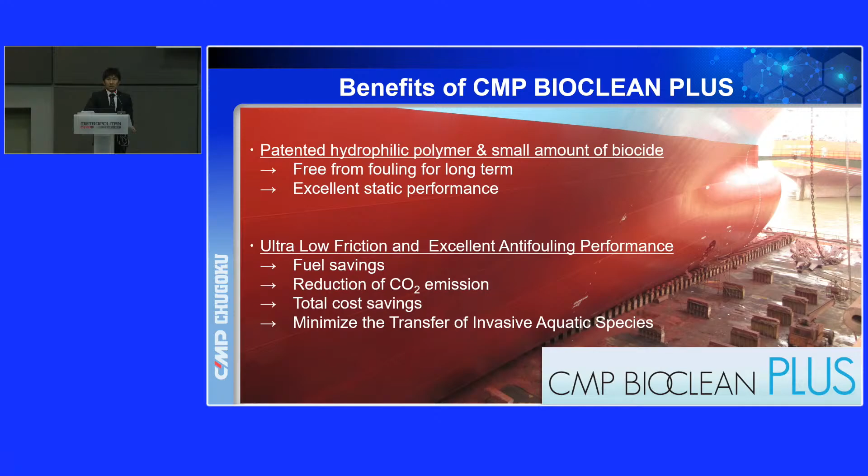This is our advanced silicone coating. Before I finish, I'd like to share with you that Chugoku's mission is to contribute to humanity and society through our cooperative activity. We believe we will be able to be your long-lasting partner in the sustainable shipping industry. That's all for today. Thank you for your attention.

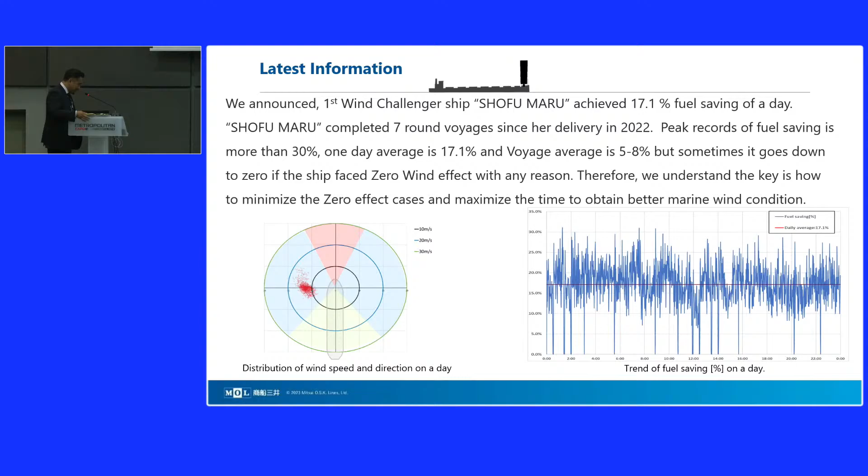All are using lift. Important is the lift created by means of the device - this is the key theory of the wind propulsion system. We'll touch upon the lifting mechanism in the next few slides.

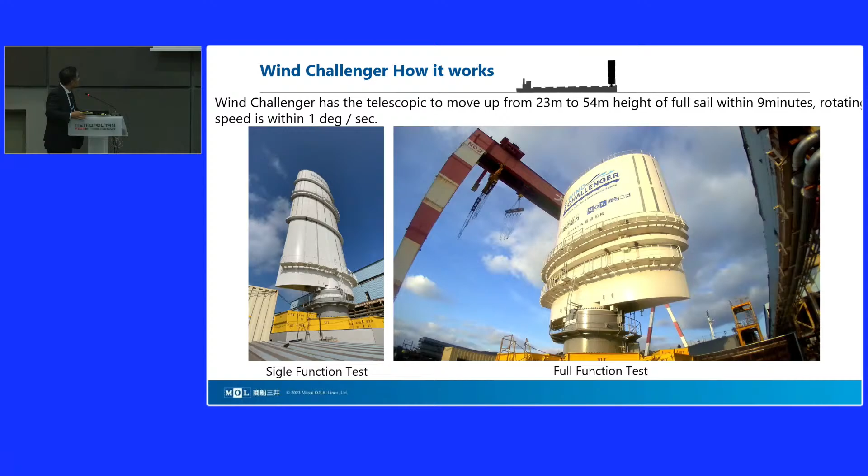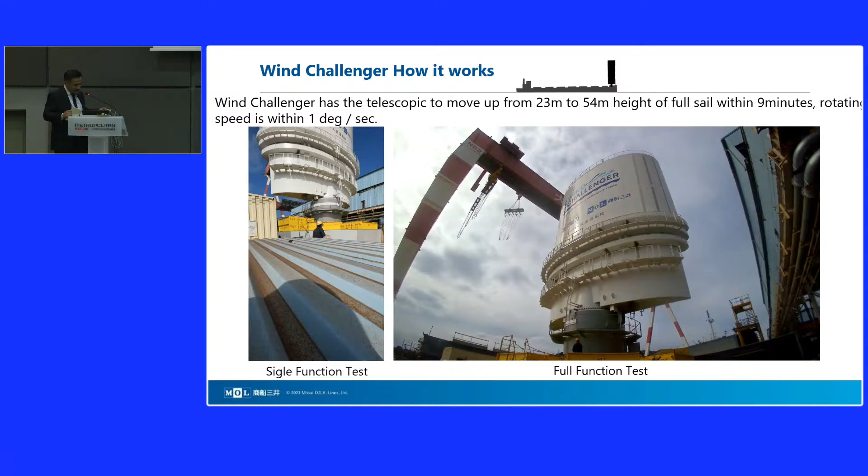Wind Challenger has a telescopic mechanism to move up from 23 meters to 54 meters height of full sail within 9 minutes. Rotating speed is within 1 degree per second. You can see the rotating as well, and the cloud - it's a little bit modified.

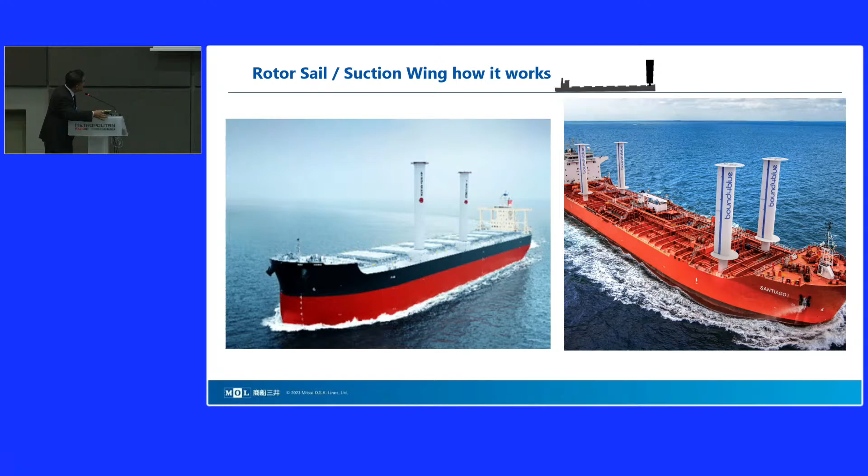This is not for the technology, but maybe I'd like to touch a little bit upon the rotor sail and suction wing, how they work.

Okay, rotor sail. The Flettner rotor rotates by the wind speed. That means self-rotation by the speed of the wind creates a different wind pressure, making the lift of the thrust force forward. That is the mechanism. Rather than my explanation, it's better to see the illustration anyway.

Suction wing. When suction is on the device, above wind flow will be attached to the sail to create a different wind pressure, making the lift of the thrust force. Like that, suction off and on.

Yeah, thank you very much, wonderful. So a little bit explain about the different character.

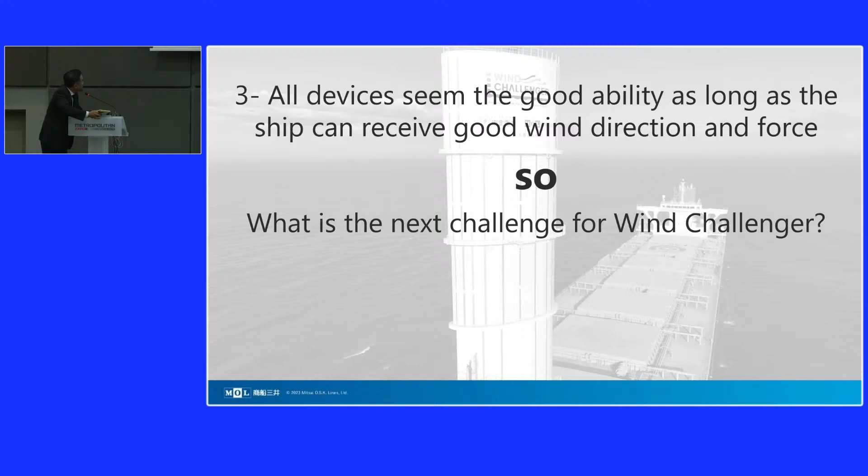Yeah, all devices seem to have good ability as long as the ship can receive good wind direction and force. This is very key. So what is the next challenge for Wind Challenger? This is a very important update for us. Okay, I think we can say we have three arrows.

First, a little detailed explanation about education and understanding of wind propulsion systems in the maritime industry. Today I introduced that the effect of wind propulsion systems is huge compared with other energy saving devices, except the CMP BioClean Plus. The effect depends on the marine wind power and direction encountered during ship navigation. Analysis of weather prediction in the ship's navigation route shall be valuable. This is one of the new trends in how to use the Wind Challenger or wind propulsion system.

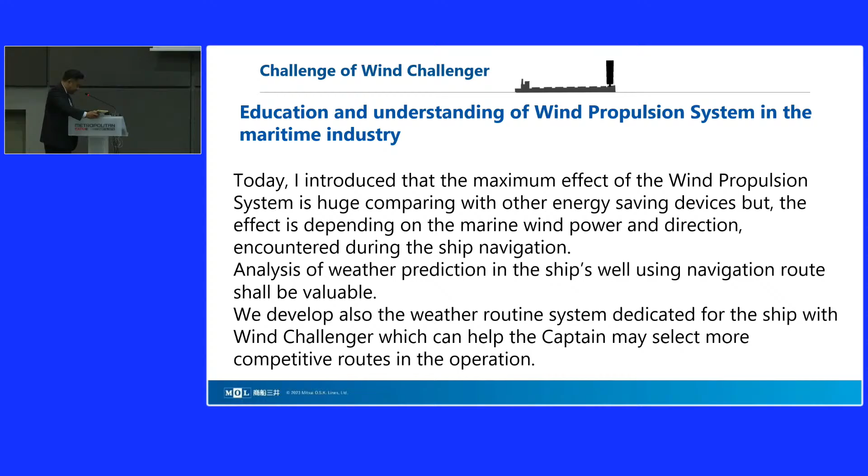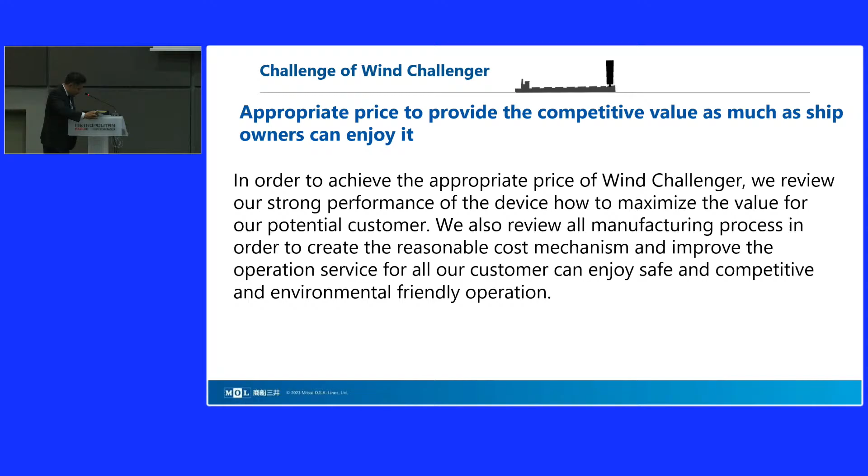MOL has now established the project team. Today, I'm one of the project members. Also, Onuki-san is the new project leader.

We challenge ourselves to improve our fleet value and aim at customer satisfaction. We also continue the engineering challenge for the future ship as below. The concept is to use wind energy as much as possible, as it is a genuine free nature and pure environmental energy resource.